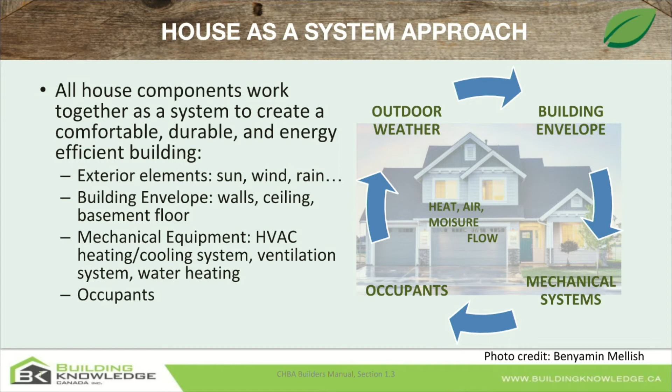The mechanical systems - our furnace, our air conditioner, our ventilation system, bath fans, and hot water tank - all of those are a key component in the house as a system approach. And lastly, but also most importantly, are the occupants and how we live in this space.

So there are 3 principles of building science that we factor in when developing plans for renovating a home to be more energy efficient. And what we're looking for are heat flow, airflow, and moisture flow.

Heat moves from hot to cold, airflow moves from high pressure to low pressure, and moisture moves from wet to dry. So why do we care about how these 3 science factors work?

That's because they have a direct impact on our comfort, our operating costs, our health, and our durability. And if we can control heat flow, airflow, and moisture flow, we can create a more comfortable, durable, and healthy home.

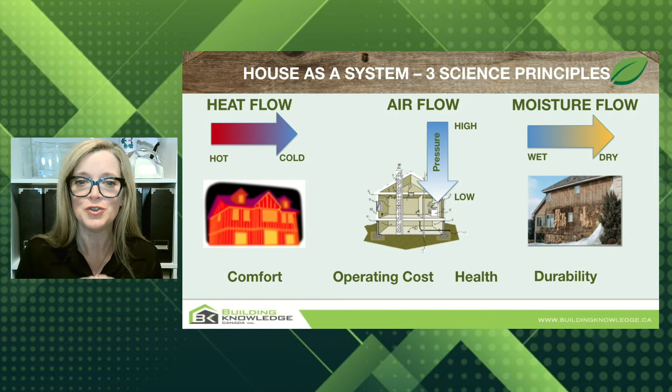So what do we want to consider when looking at the house as a system? These are important considerations. When we talk about the house as a system, an ecosystem, when we change one thing, it can impact another thing. So we want to be mindful of how the house operates together and make improvements to have the best result we can.

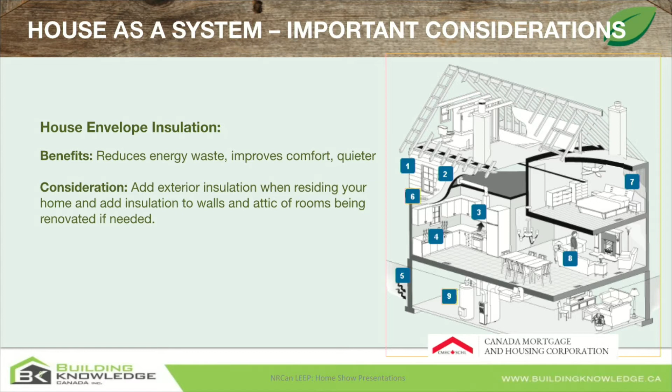A benefit of adding insulation to the home is it reduces energy waste, improves overall comfort, and the home is actually quieter. So if you're doing an outside renovation, like residing your home, that's a perfect time to add exterior insulation and address air tightness, making the home more comfortable, quieter, and more energy efficient. If you're doing inside renovations, such as a bathroom or kitchen, consider insulating the walls while you're in the mess to improve that area of the home. And also the attic. We lose a fair amount of heat through the attic, especially if it hasn't been insulated before, so consider adding insulation there.

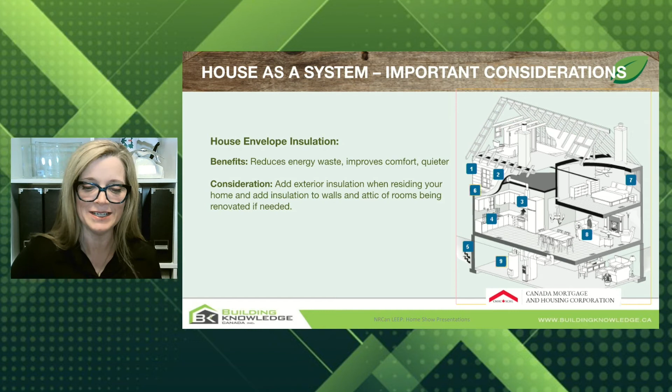Another consideration is air sealing. This one gives a huge bang for your buck. The benefits of air sealing a home: it reduces heat loss, improves comfort through reduced drafts and uncontrolled air leakage, reduces dust and pollutants entering the home, reduces risk of mold and rot and outside noise, creating a quieter home, and reduces energy use and operating costs. That's a lot of benefits you get from air sealing a home. So absolutely this is something we want to do. We want a really nice airtight envelope and an airtight home.

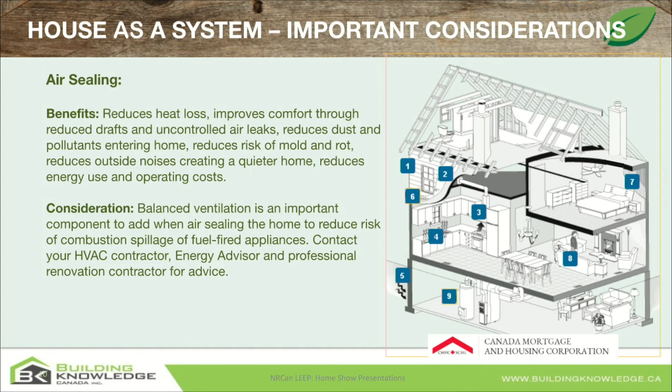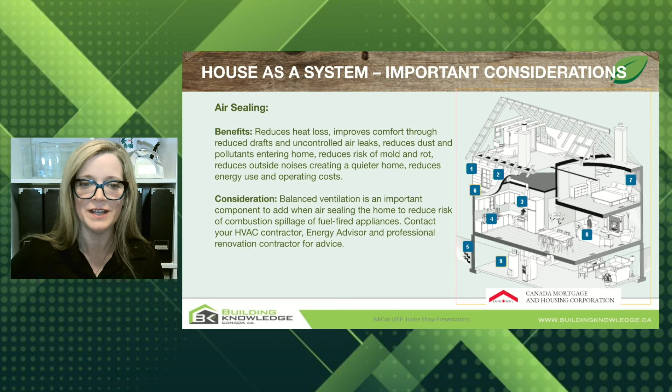But because we're really sealing it up, we want to make sure we have proper fresh air supplied to the home. So balanced ventilation is incredibly important to add when air sealing the home, to reduce any risk of combustion spillage from fuel-fired appliances such as hot water tanks or furnaces, which could create risk with carbon monoxide. We want to be mindful of that, and also make sure we have fresh air supply to manage moisture and have that constant, steady fresh air supplied to our family. So when you air tighten and air seal your home, be sure to speak with your HVAC contractor, your energy advisor, and a professional renovation contractor for advice to make sure any risks are resolved.

Now windows and doors are another common renovation, and these are really beneficial to you. Some benefits are the home can be quieter, less drafty, more energy efficient, and more comfortable than older windows, especially compared to really old single pane windows. Going to a double pane window with low E coatings or argon fills, or going to triple pane, which is even more comfortable and quiet, are options we have today.

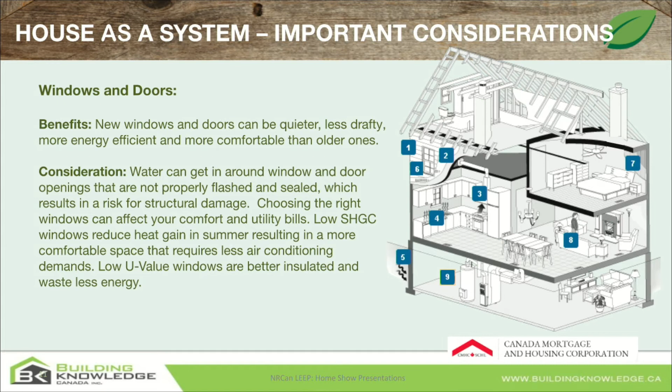Some considerations when looking at windows: water can get in around windows and doors, and it's actually a common problem that can create structural damage, rot, and mold. So make sure that when you're having new windows and doors installed, proper flashing is installed around that opening before the window is inserted, to prevent water from getting into the structural framing. The flashing creates a barrier so that should water get in around the window, it simply drains away.

So you want to make sure that's flashed and sealed. And the other thing that you want to do is make sure that you choose the right windows. Not all windows are the same, depending on the types of coatings, the type of glass, the type of fill that is put inside the windows, the number of layers of glass.

All of these have an impact on your comfort and how the home operates. So look for windows and pay attention to the solar heat gain coefficient, which is SHGC. That's the acronym for it. Look for solar heat gain windows that are ideally on the lower side, especially as we make our homes more energy efficient, because even though we live in Canada and it's cold in the winter, there can be disadvantages to having solar heat gain coming in through the windows.

In the summertime, especially on south-facing rooms, that can become very hot and it can become very demanding on our air conditioning. So what you want to do in that case is speak with your HVAC contractor and your energy advisor and professional renovation contractor, and they can give you advice on what is the ideal solar heat gain coefficient you should have for the windows that you choose.

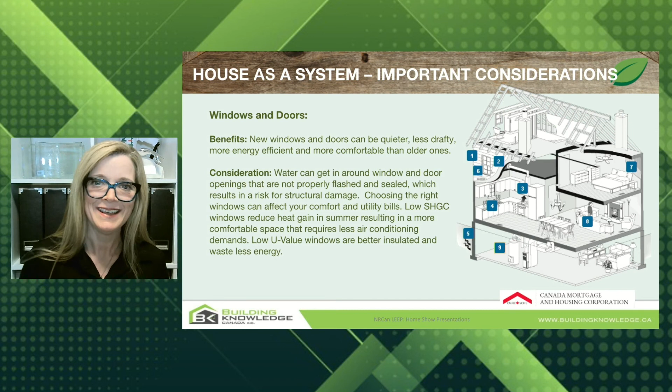And lastly, what we're going to look at is mechanical ventilation. So the benefits of proper sized, balanced mechanical ventilation and mechanical systems is that it provides a healthy indoor air quality while delivering comfort with even temperatures throughout the home. So some considerations, and this is really where the house as a system comes into effect.

When you're renovating your home, when you're air sealing, when you're adding insulation or changing windows, consider having a heat loss, heat gain calculation completed to ensure that when you go to replace your furnace with a new furnace and an air conditioner, that it's properly sized, because all of those components we talked about—the windows, the insulation, the air tightness—all have a direct impact on the size of the mechanical equipment that you put in your home.

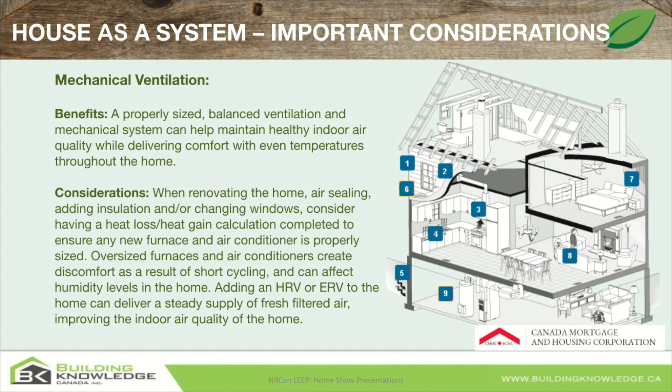And you may think, well, a bigger furnace is better—it is cold in the winter and we want to make sure we have lots of heat. But actually, that's not the case. What we want is right-sized mechanical equipment, because oversized furnaces and air conditioners can actually create a tremendous amount of discomfort through a phenomenon called short cycling.

So what happens is the furnace comes on, it's very powerful, it provides a lot of heat. In the wintertime, for example, it satisfies the thermostat and shuts off right away. What happens is all of that heat didn't make its way to all of the corners of the house. So you can end up with rooms that are really hot in the summertime because the cooling didn't reach that area, or very cold in the wintertime because the heat didn't reach that area.

So having right-sized mechanical equipment is really important, especially as we make our homes more airtight and more energy efficient. Another thing that's very important that we've touched on is adding an HRV or an ERV to your home. This is like the lungs of your home, and it provides a steady supply of fresh filtered air that improves the overall indoor air quality of your home.